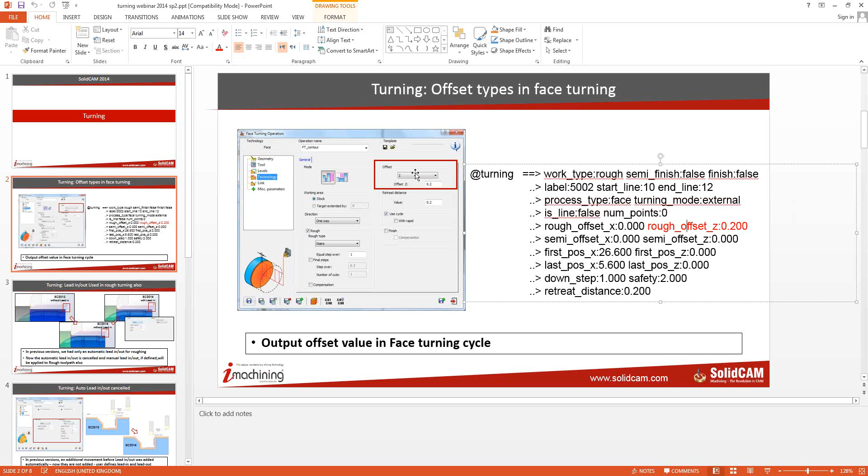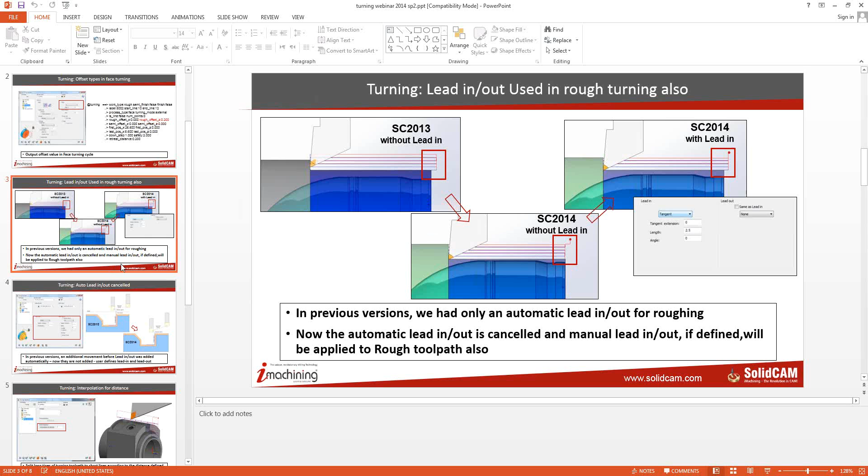That means the user always needs to add lead in and lead out manually. It's not automatically added now, and the reason is we want to make it the same as our milling module. In milling, if you don't add any lead in or lead out, you don't have it.

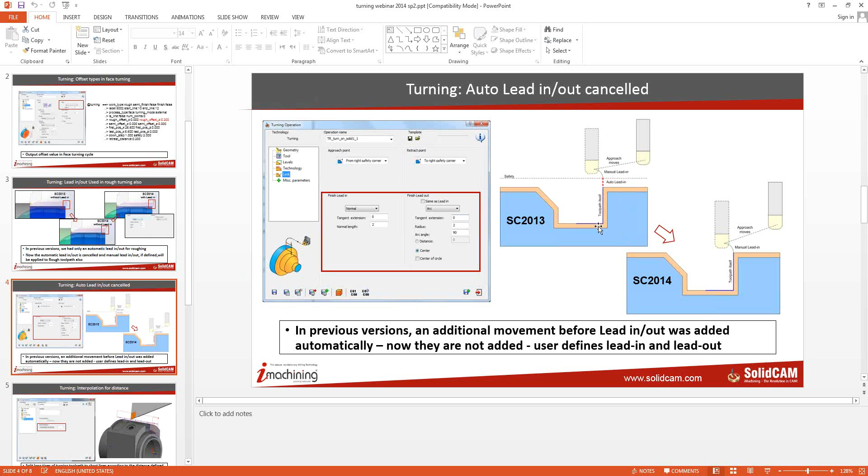The same is true for turning. But even if you don't define any lead in or lead out, we don't crash into the material. We still have a small distance when we approach the toolpath, and it's calculated automatically by the rest material and the shape of the toolpath.

Interpolation for distance. This option was implemented by customer's request, to solve the problem of long chips that are going to be caught by the spindle, by the jaws, and around the tool.

It makes some problems. So when we have long toolpaths, we can now split the toolpath into small lines, and the tool will make a small, very short stop at every point, and the chip will be broken.

We break the chips. That's the new option, interpolation for distance. We split the line with the amount, the value that you define, in equal steps. So if you have a toolpath with a line 100 millimeters, you split it into 5. Every time we go to Z -5, -10, -15, -20, and every time we stop and break the chip.

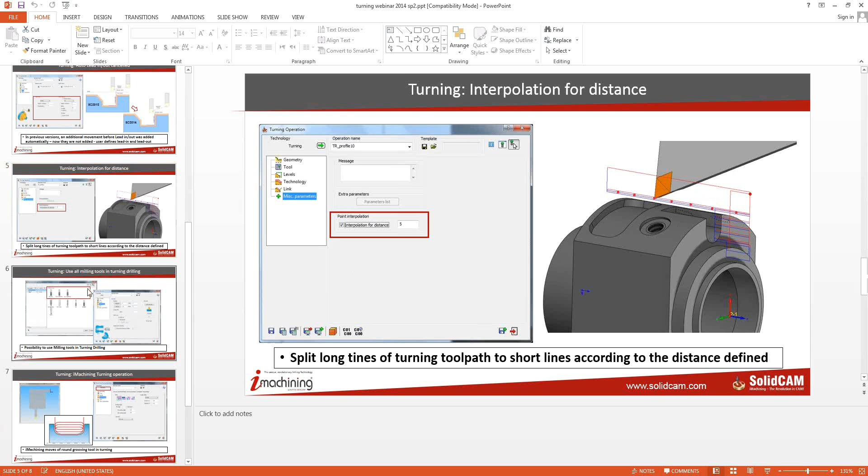A new option is we can use turn drill milling tools like end mill, bull nose, and ball nose mill. Before, we didn't have this option — only drill types like reamer, tap drill, spot drill could be selected. Today those milling tools are also available to be selected on a turn drill operation.

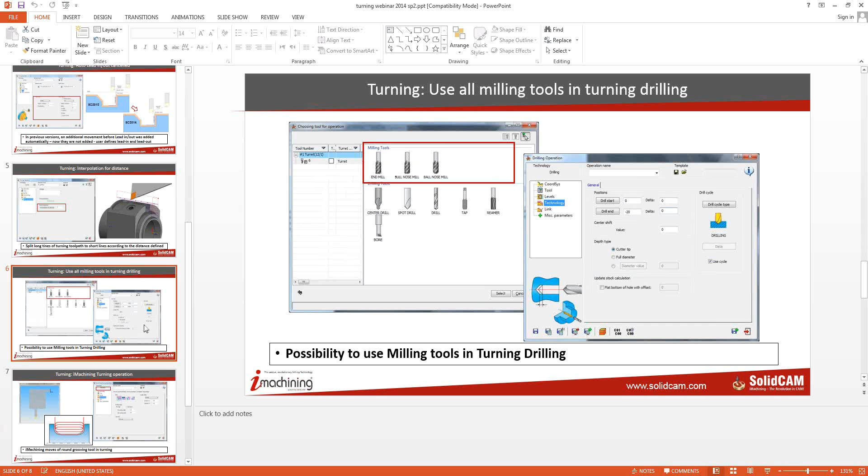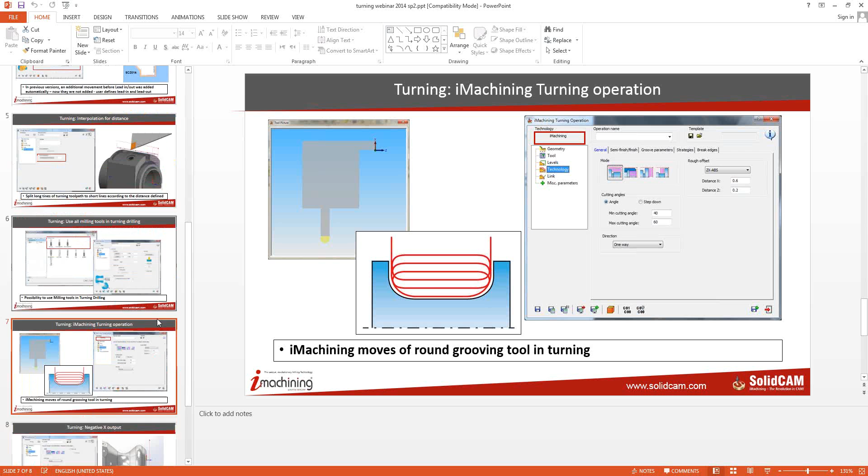iMachining — I think we talked about this in a previous version, but the toolpath was improved today, and I will explain how the cutting angles work and the difference between working with step down and cutting angle. We will have an example of iMachining, also internal, and also with negative X output.

This is also a new option that we put on the technology. You have tools and different situations when you need the toolpath on the negative side of the part, not always on the positive. So with a small checkbox, a suitable tool, you will get the correct toolpath on a negative side.

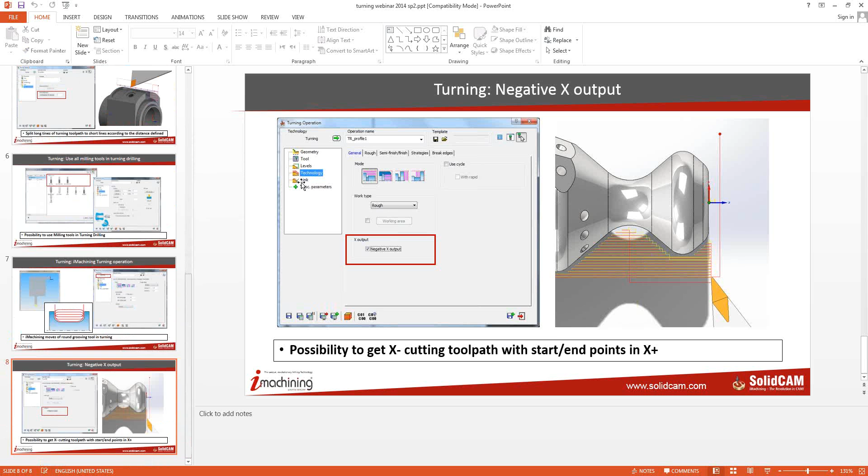Those are the new features for Service Pack 2. We will also talk a little bit, as a reminder, about the approach and retract points and how to use them.

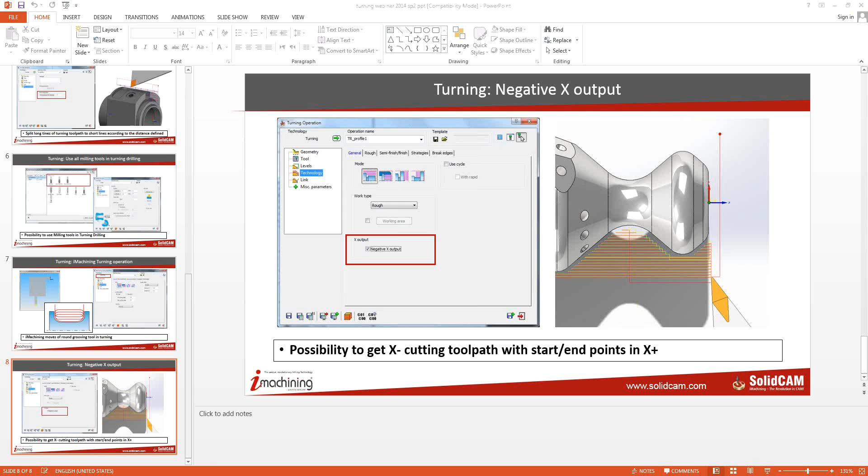So let's start with the first one, the face operation. I have a simple part here where I can demonstrate and present those new options.

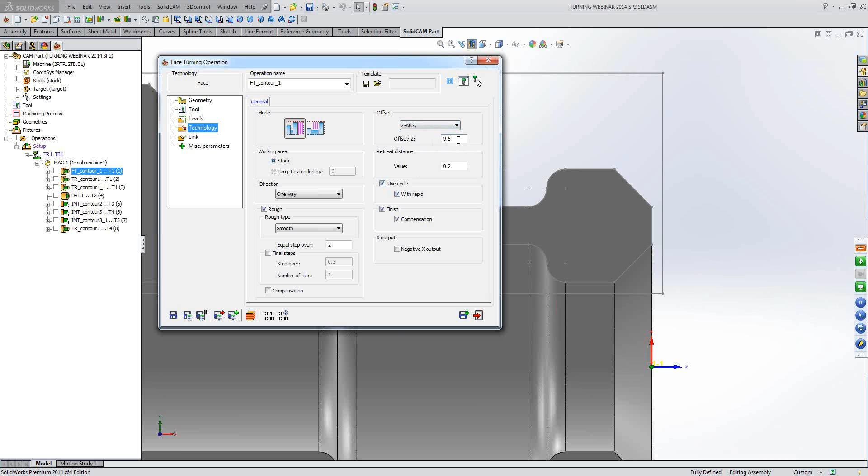Select the standard tool and get the face operation. The difference here, the new option, is when we use a cycle with rapid or without rapid. Before that we have only the absolute. That means SolidCAM, the software, will create offset of the geometry and generate the toolpath based on this offset geometry.

Now, when we work with the cycle, the users want to use the U and W letters in the cycle to change manually in the program on the controller, and not to get back to the software and generate a new G-code, change the offset and generate the new G-code. They want the option to change the offset in the cycle.

So for this we add this new type of offset Z, and now we get in the G-code as we see in the picture, turning rough offset 0.5 here with absolute. SolidCAM will generate the offset, so you will not get any offset. That's what related to the face operation, new offset type.

Here I define a rough operation with the same tool, and the geometry is external. Start from here to the end of the part, and link. Let's see the difference without lead-in. Save and calculate. Let's see the toolpath.

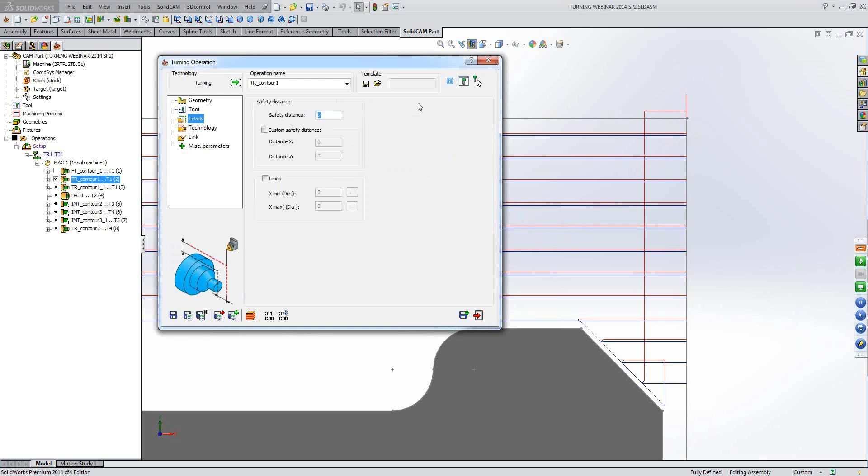On each step we automatically add the safety distance of 2 millimeters on the toolpath, but on the last step here we can add. It's a rough operation, only a rough without finish. Here we can add a lead-in option.

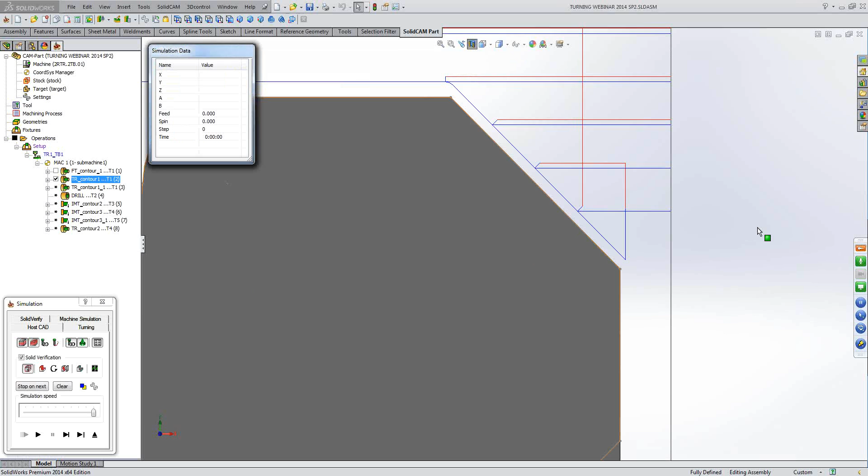Even if you don't use the lead-in, the tool will not crash into the material. Simulate. Let's see the simulation. I will not use the solid verification. Go.

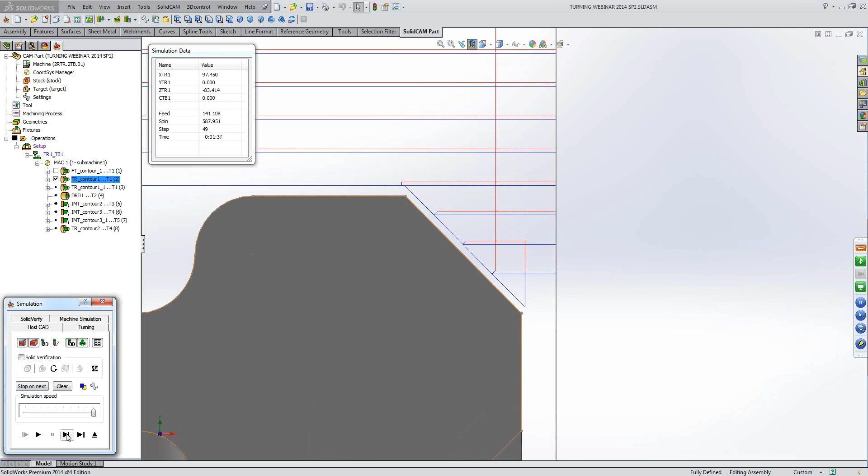I miss this step, so we are going again. I didn't stop at the right time.

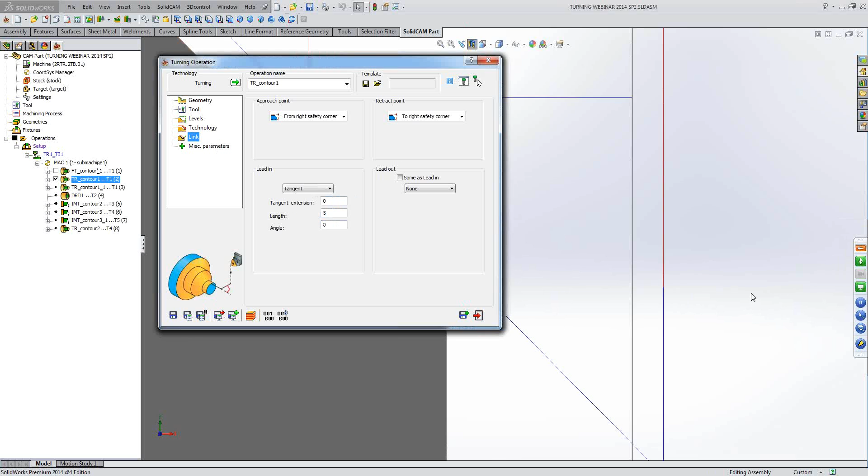Now, here you see this last step is without lead-in, but we still have a small distance between the material and the tool that is automatically added. So even without lead-in, we don't crash into the material, but when we add, say, 3 millimeters tangent extension, save and calculate. Now you see here the lead-in on a rough operation. So it's available only for the last step.

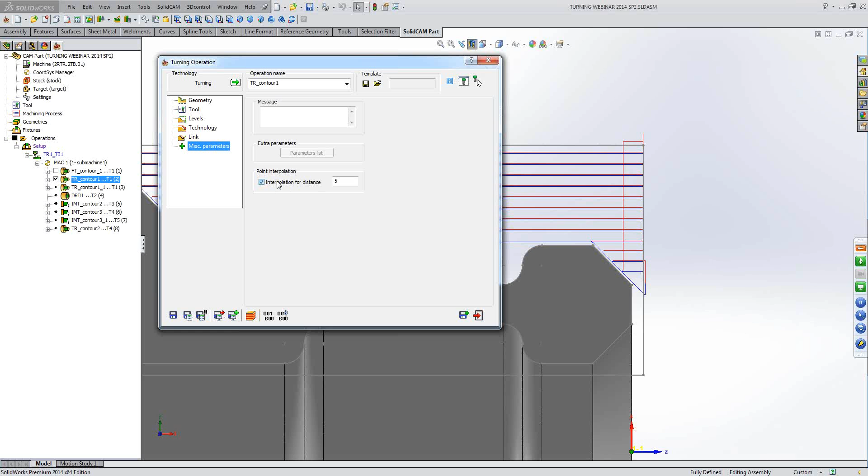Here also I can present you how the interpolation for distance is used. We don't see in the simulation how the toolpath is split, but we get it in the G-code.

From here, let's see the same diameter, 15 here we have a long straight line on the same diameter, but we stop with Z position at -2.8, -7.7 every 5 millimeters. It's not exactly 5. We divide this toolpath from start to end in equal steps, up to 5 millimeters, no bigger than 5, but the steps are equal.

So it's like 4.8 millimeters, and 17.4, 22.3. Now, in the G-code, to achieve this stop and chip breaker, we need to change the post and add maybe a modal exact stop command, like in the start of this toolpath. Here, after this rapid move, here we start with the line.

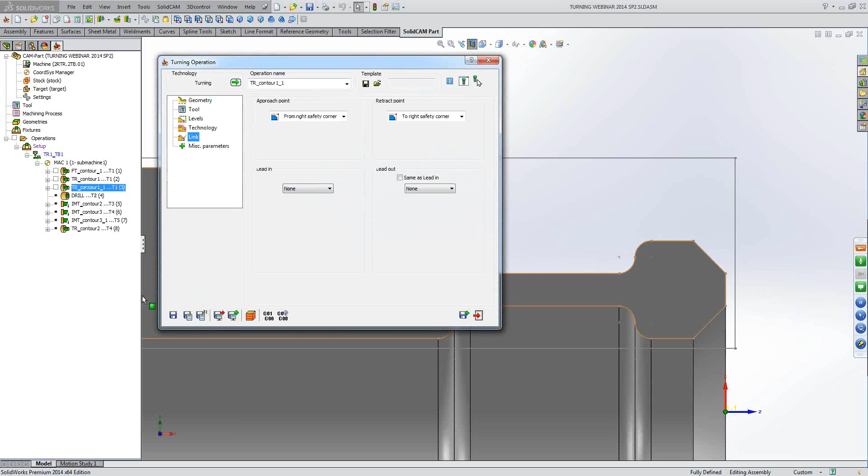Okay, now let's go to see the lead-in in the finish operation. I make a different operation here, a separate operation for the finish. And first we'll see the toolpath, save and calculate, without lead-in.

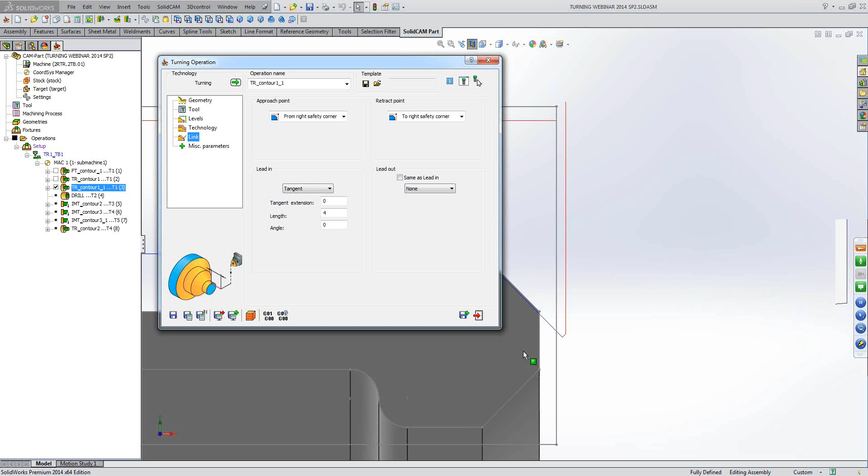Here is the toolpath without lead-in. Also, in this situation, we don't crash into the material. We have a small safety distance calculated depending on the angle and shape of the geometry, and with lead-in. You can see directly the toolpath, the extension at the start of the toolpath is added here.

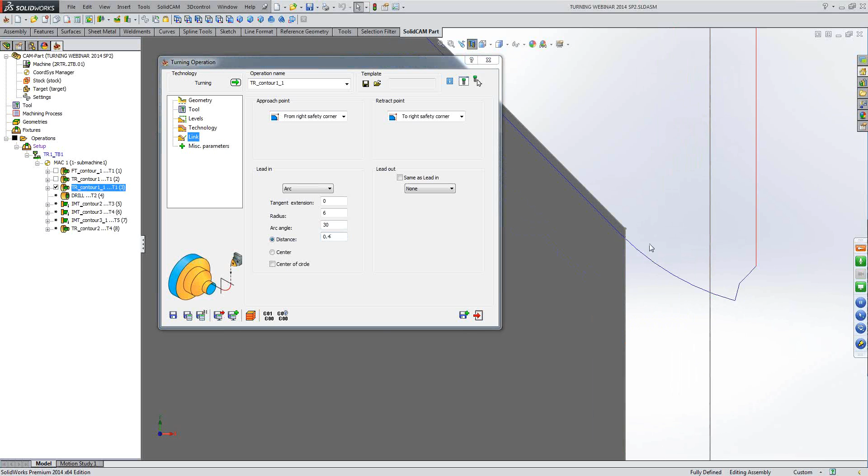Now you can use also an arc, for example. Let's see, 6 millimeters on 30 degrees, and you get the extension, the lead-in, and start of the job. But the difference in this version is it's not added automatically by the software. The toolpath we start without any lead-in.

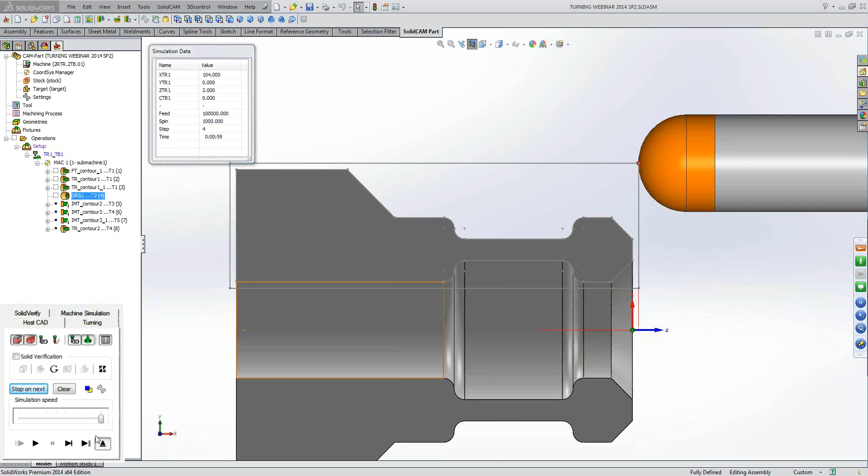We're going to the next option, where any milling tool, bullnose or ball nose, can be used in a turn drill operation. So here I select a ball nose tool. I don't know if it's technologically correct to work like this, but there are cases when you want to use a different tool than a drill, reamer, or boring bar. Let's change tool type to bullnose 13 with 5 millimeter corner radius, and I just need to change this to 5. Save and simulate.

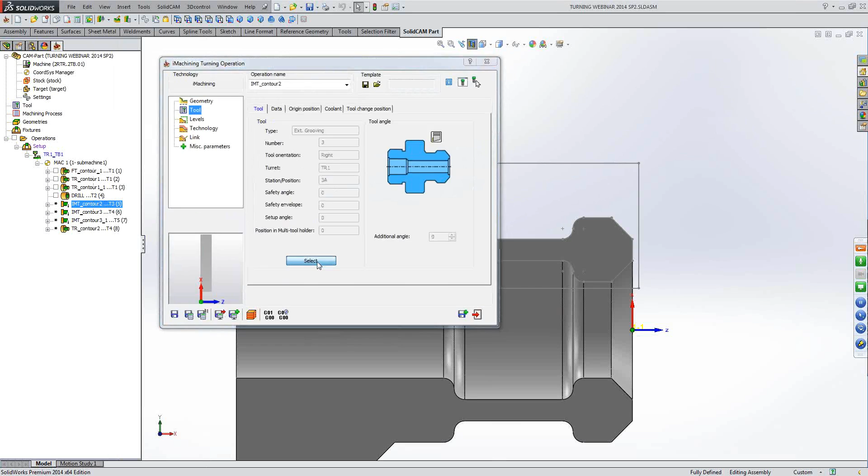That's also a new feature. We are reaching the point to show you the iMachining. iMachining was added to the list of turning operations, iMachining on turning, and it can work only with a grooving tool, tool type grooving with a round insert — not square, round — because it works with the same logic, the same toolpath algorithm like the iMachining for milling, depending on cutting angles or step down.

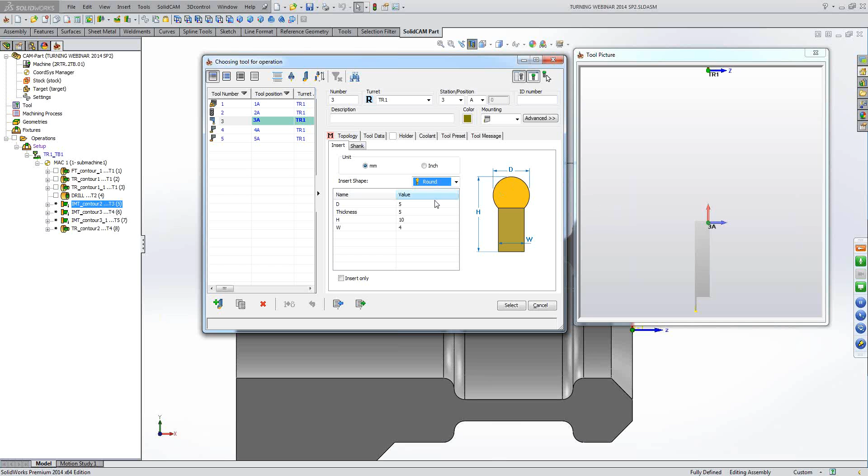I select this geometry here, and the tool, the grooving tool. In the technology we have two options: step down — let's say 0.5 is minimum and 1.5 is maximum step down. Again, depending on geometry shape, we'll get different step downs in the toolpath. And direction can be one way or zigzag. Simulate.

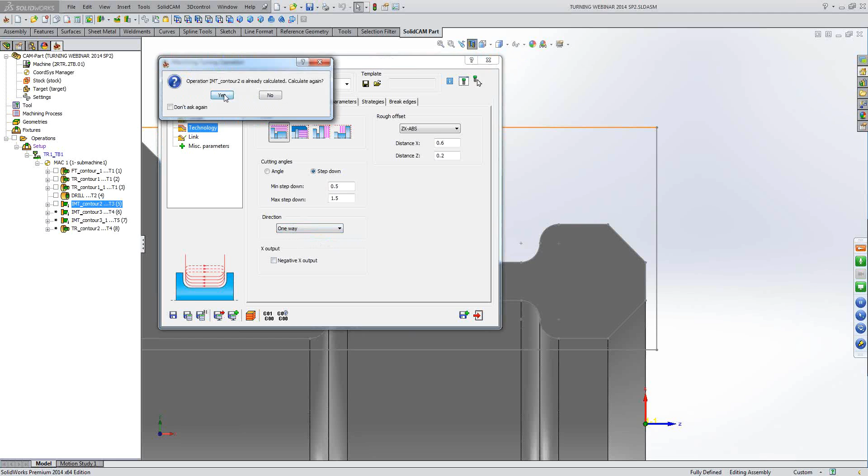Let's use the solid verification. This in HostCAD is also a new feature — it's not new in SP, ServicePack 2, but it's new in the 2014 version. You can use solid verification in HostCAD, and you can also see the 3D tool and the holder if you define a holder.

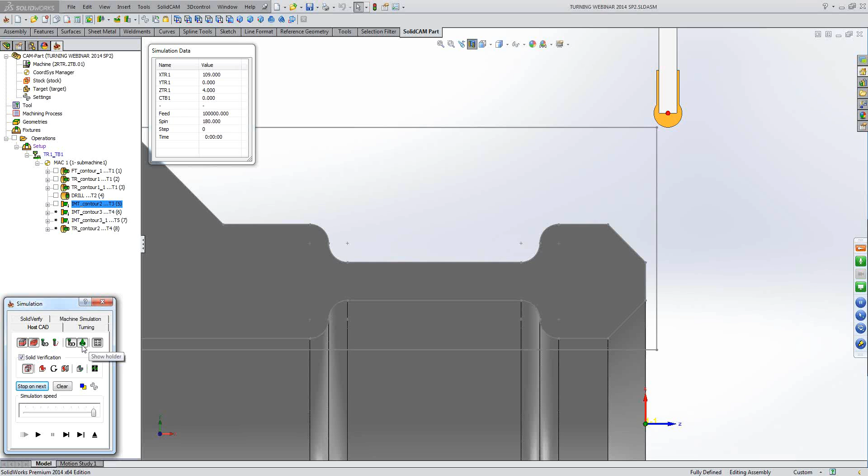We don't have one, so let's define it together. We have this grooving tool and holder. I'm going to select, not milling, turning. In 2014, also in the STL holder database, we can split to define folders and save milling and turning holders however we want, and rename the folders to organize our database more easily.

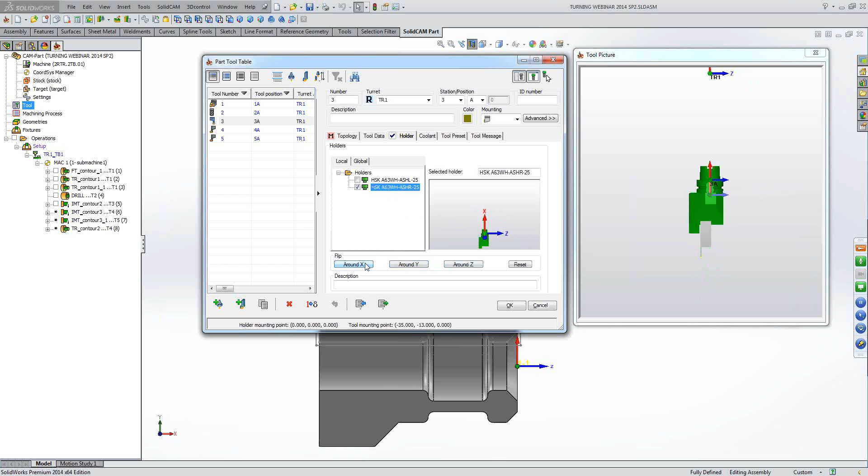I'm going to select an HSK. Yeah, that's good for me, I think. Left, and rotate around Y. Now I should select right, because it's a right tool. HSK, R, okay, and rotate around X. Now I get the holder.

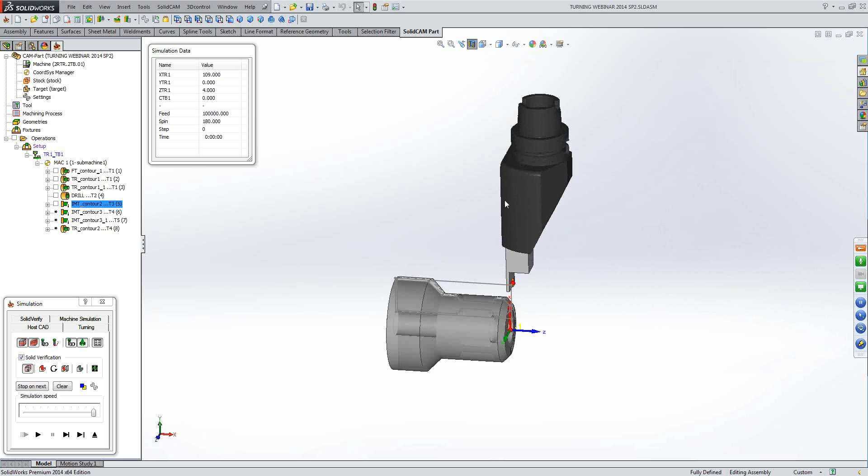Let's see here. Save and calculate tool. Simulate. Now, in HostCAD, we can also see STL holders today, and solid verification. You can show or not show it.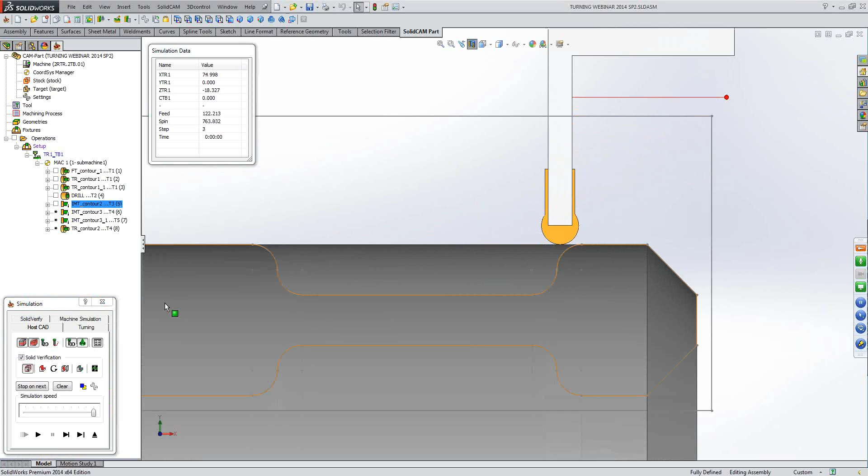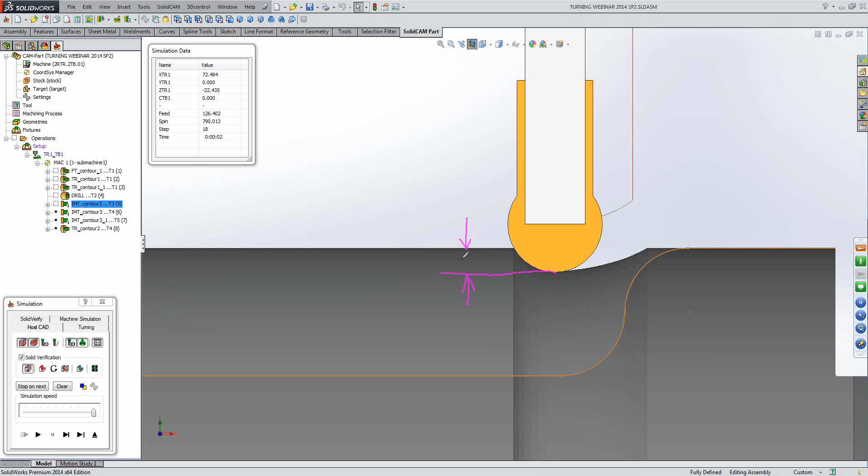Now, the difference between step down and angle. When we work with step down, we have a minimum and maximum. Let's see my talents in drawing — don't laugh about my talents in drawing. This is the depth, and from here to here, step down cannot be greater than what we define, 1.5 millimeters defined in the operation technology, and cannot be less than 0.5.

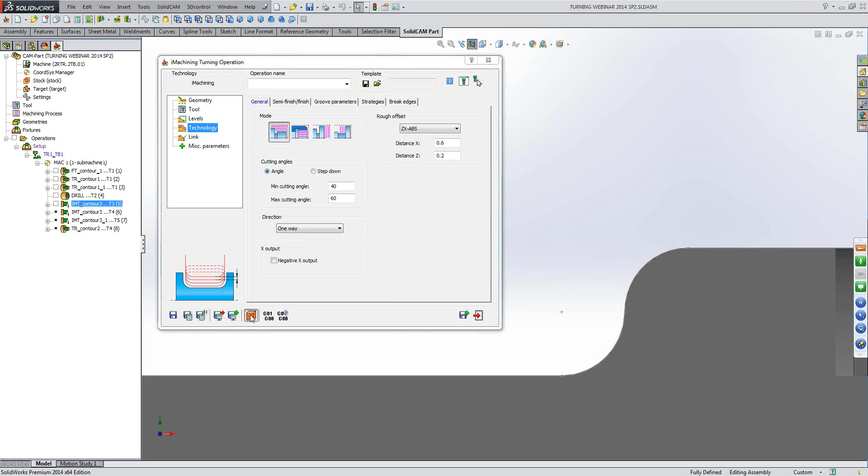Now let's erase the drawing and change it to angle. 40 degrees minimum, 60 degrees maximum. Save. Now here we calculate in this way: from this point up to this point we have an angle. This angle cannot be less than 40 degrees or greater than 60 degrees, what we define.

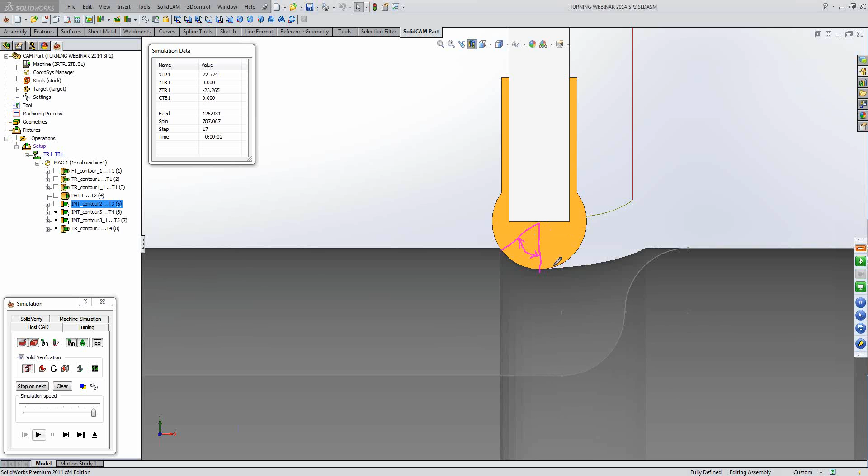Those are the cutting angles — the angle where the cutting edge between the points of the tool edge is touching the material. So let's delete it, erase, and okay.

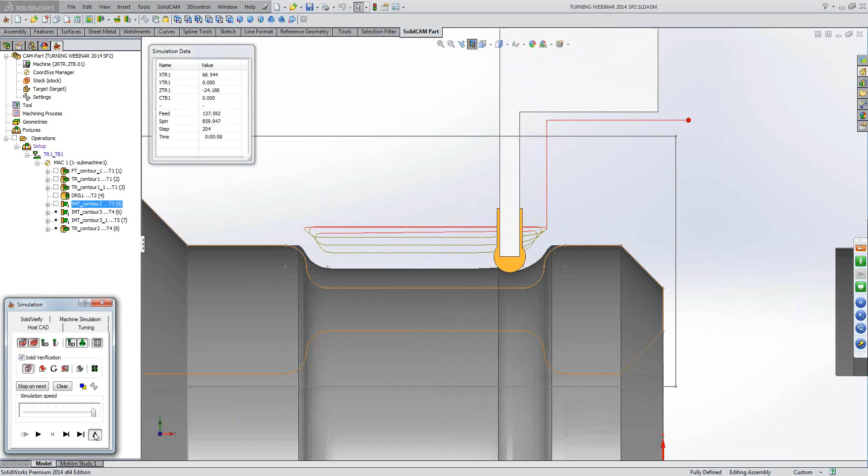This is about iMachining technology, and here we have a toolpath with one direction — it will always go in one direction. This is what we defined here, but it's better to use zigzag, and in this way the tool will be equally used all around the cutting edge, not only one side — going forward and backward.

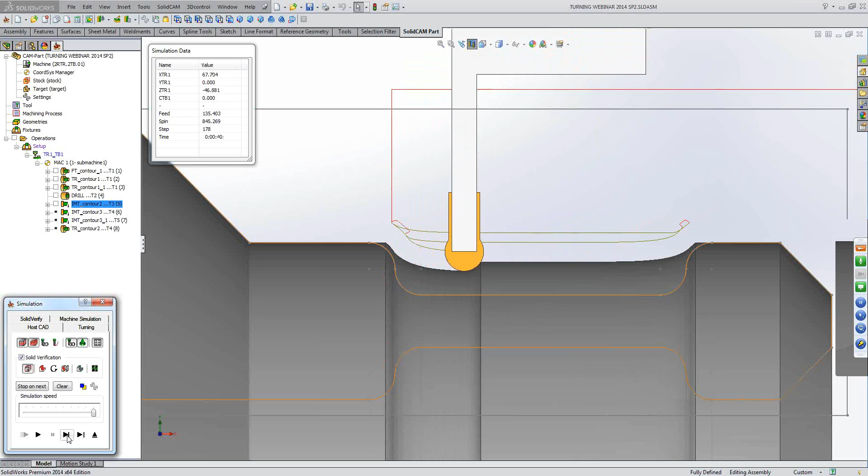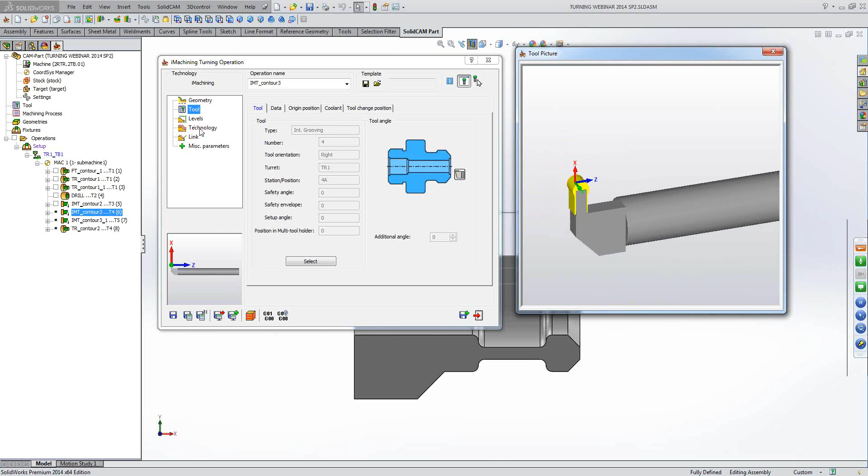Now the same operation, the same iMachining. We have an example here with an internal grooving tool — an internal grooving tool with a cylindrical shank, with the same options, same technology, and we can work inside the part also. We select in technology 'long internal,' and yes, we work internal. Let's see in the turning.

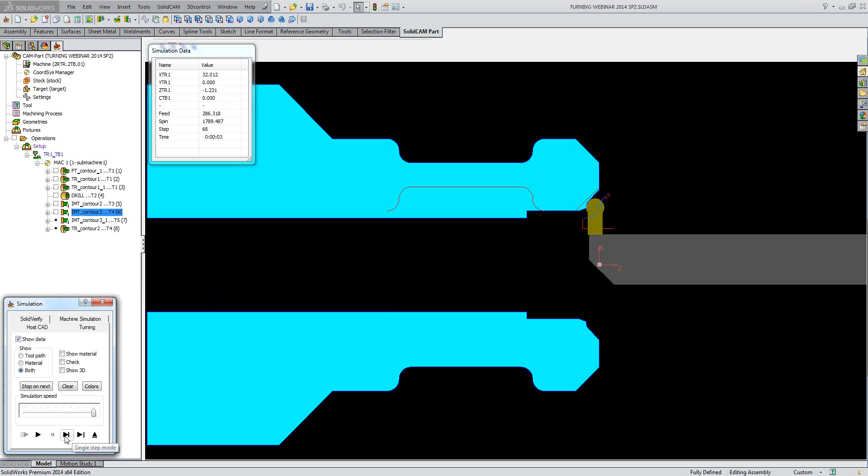For the turning, this is the best simulation. Here I define two geometries in the same operation: this line and this profile. Here it's a finished surface by turn drill, so I don't need to touch it. And it's going to remove all the material here also, using zigzag technology.

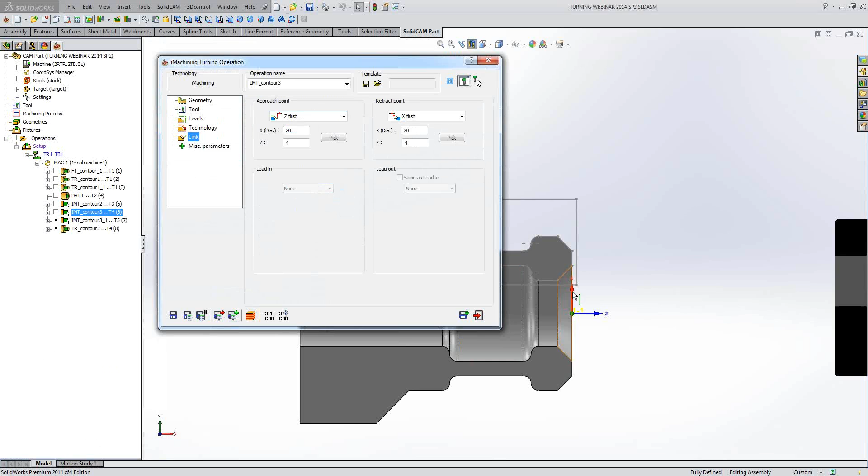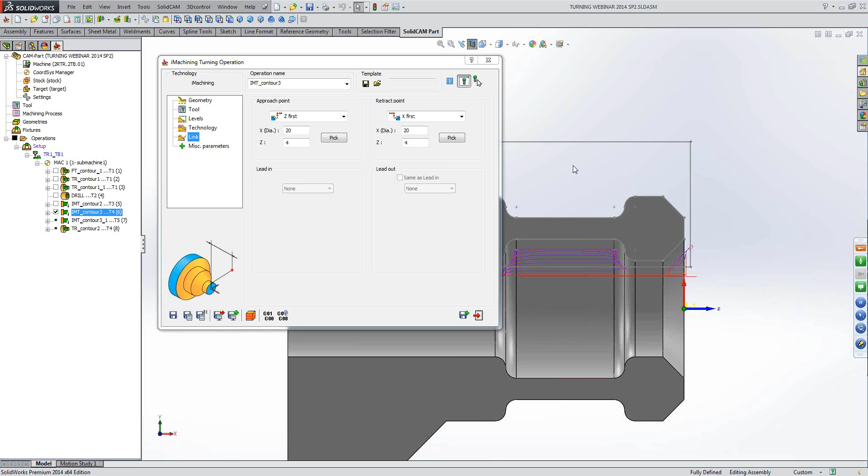Okay, now also pay attention about links. When I want to enter, to bring the tool inside to work here, easy for me is to use the approach and retract point. I define the diameter, X and Z position, bring the tool here, and from this point you are going to start the toolpath, and from end of toolpath you retract to this point, X first. If you can see here, the toolpath is finished here. We go on X and Z axis to the retract point, and for the approach point, first we go in Z and X direction. You have several options, you can choose the best for you.

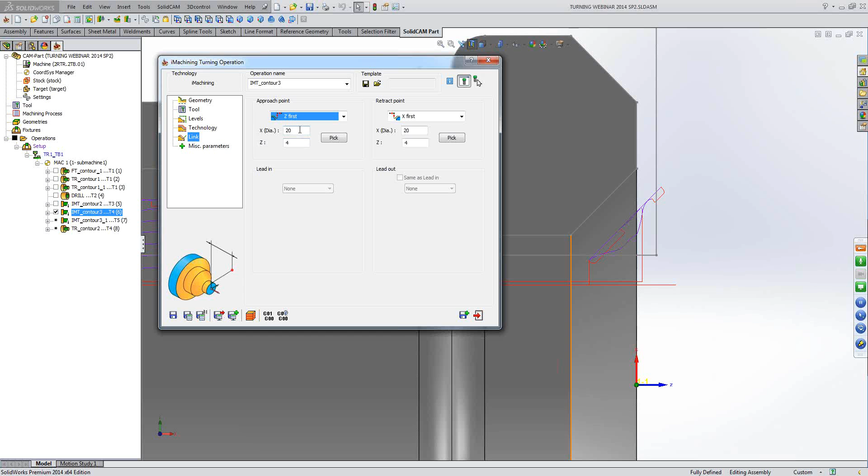Now the same example with internal turning iMachining operation. I will suppress this, and unsuppress. It's unsuppressed. Calculate.

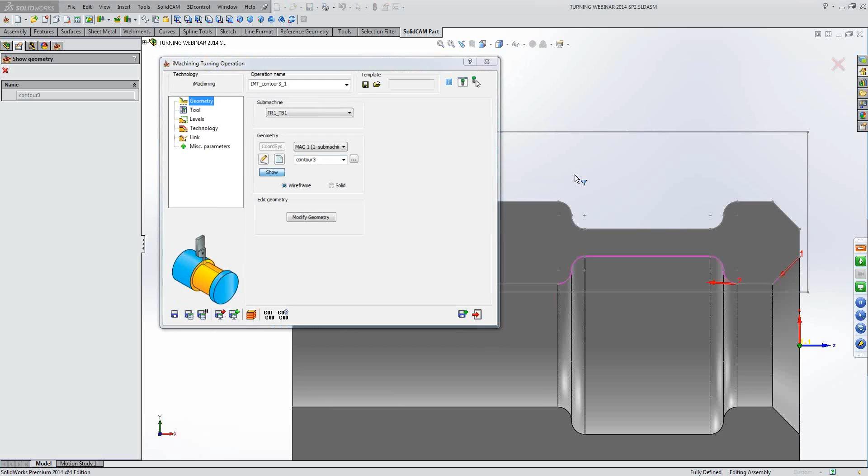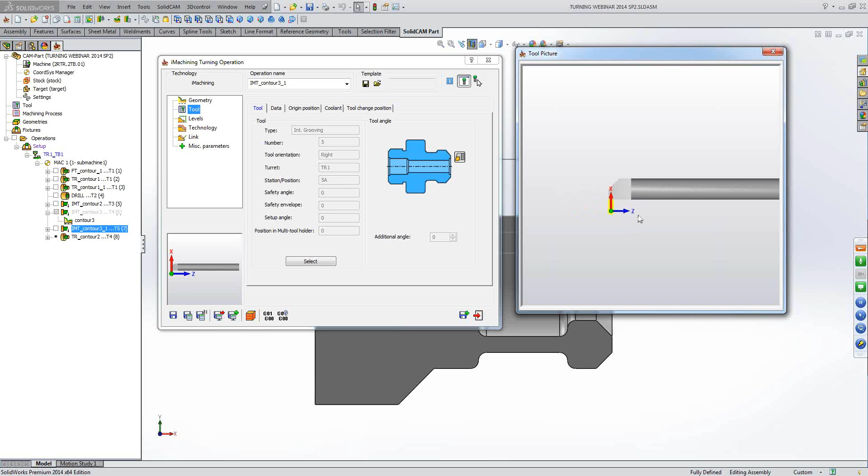I use the same geometry, contour 3, and here I also use the same geometry selected on the envelope, upper envelope in the positive side of X, but I want to work on the lower side, negative X. The only thing we need to do is select the proper tool with the insert oriented down, or if you have an option to reverse the tool, if you have a spindle turret with reverse option, you can use the same tool and reverse. But here on a rotary turret, this machine has a rotary turret, I need to define a new tool with the insert in the opposite direction.

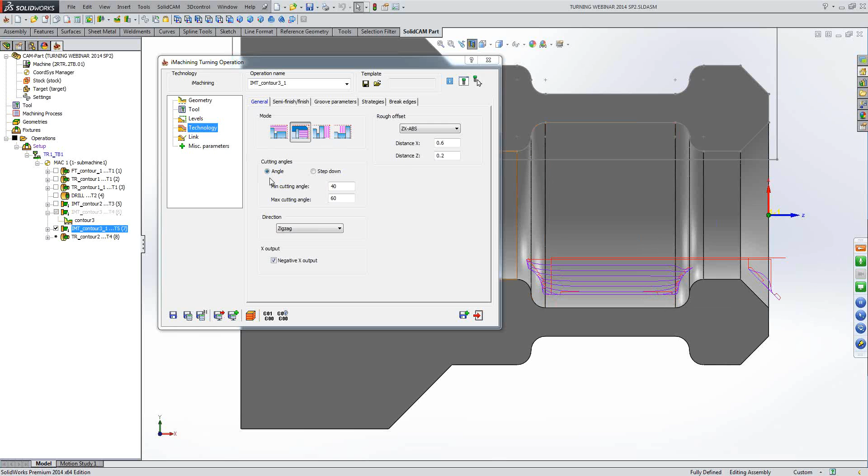And in technology, just use the checkbox negative X output. Save and calculate, and let's hide the tool picture. You get the toolpath in the negative side, the same toolpath, depending on the tool, and this option is very useful on lathe machines with not so many stations on the turret. If you have only a rotary turret with 12 stations, that means a maximum of 12 tools you can mount. So in this way you can use the same internal tool here, and also work with this internal tool

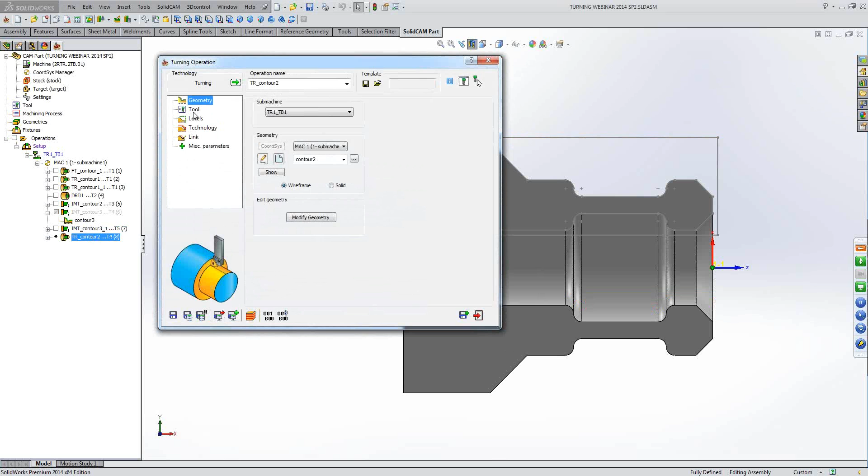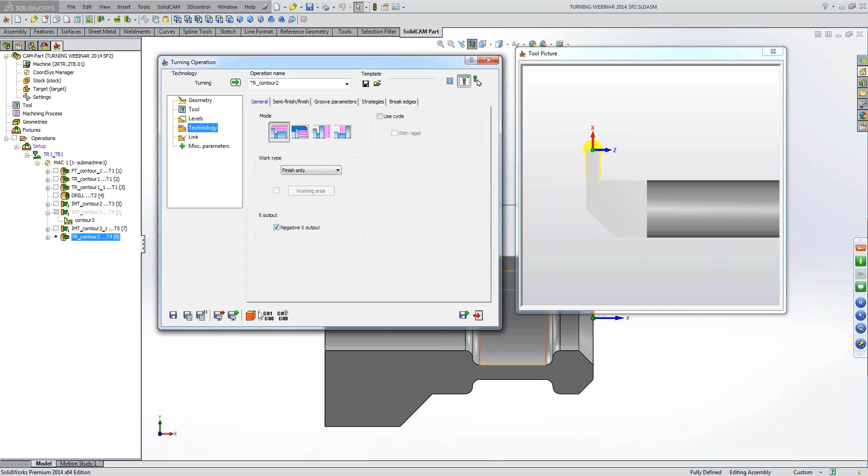outside, or opposite. Let's see the next example. If I have an internal tool, next example for negative X, I have the internal grooving tool, which I use to remove material here with turning ID machining on the upper side, in positive X. Now I can turn on external with the same tool on the negative side of the part. The only thing we need to do is define here a turning operation, only finish, use the negative output, and we get the toolpath on the negative side.

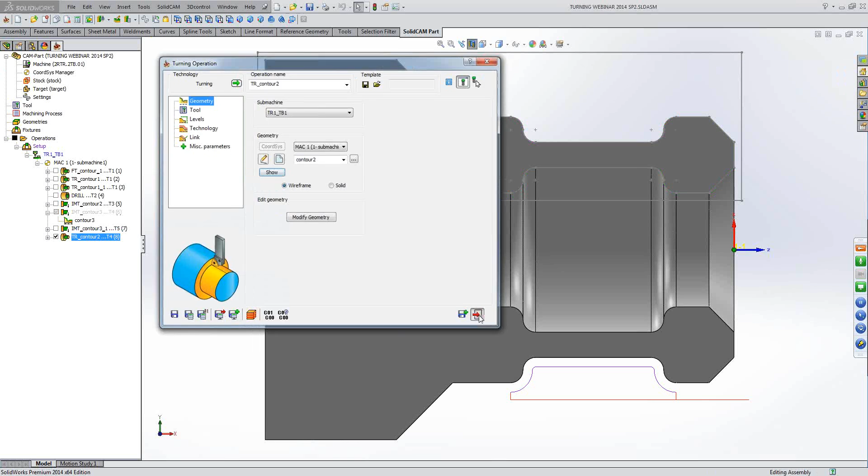Again, the geometry is selected here on this side. We don't need to go to target and define a mirror envelope. This is what we used to do in the past. In order to define a geometry on X negative or to work with the lower turret, we needed to define the envelope mirror and get this envelope also on the negative side. Today this option is not needed. It's still here if you want a sketch, but it's not needed to program the part.

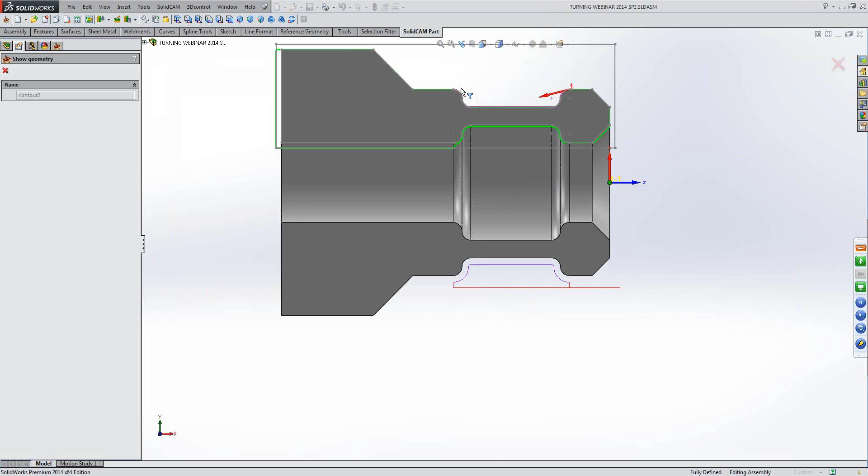I changed something here. Okay. Where were we? So the geometry is on the upper side of the part, but using the negative X output we can work on the lower side. Also, always use approach and retract points to define a safety position from where the tool starts the toolpath and where the tool goes at the end of the toolpath.

Those are the new options that we have in 2014. As I said, I will say again, it's a very stable and very fast version. We already started to install it for our customers. They are very happy with it, and I recommend you also download and use it.

That's all for today. If you have any questions.